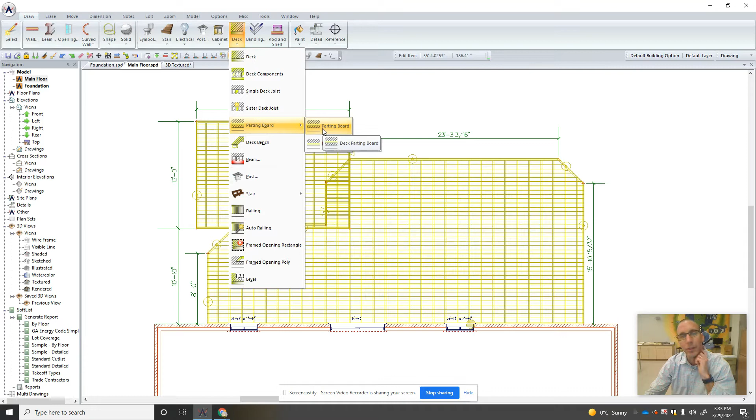Parting board, let's put it down the middle here. Let's take a look here. Oh, nice. So you can split them up, get a little fancy. Cool. All right, we can throw another one in here at this corner. Oh, that just got rid of all the deck boards in between. Have to play with that. Okay, anyways, let's get back to what we're doing.

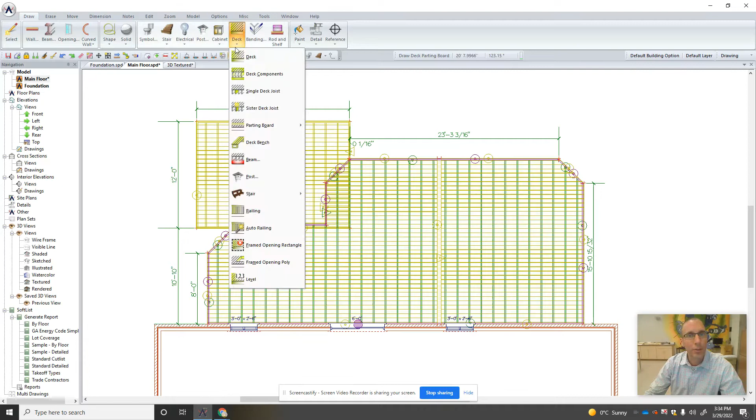So under deck, we've got our beam. Here's our beam sizes. So once you figure out what sizes you have to deal with or use, you can pick them up here. So there's your 2-ply 2x6, 3-ply 2x6, 2x8, etc. So I'm just going to pick a 3-ply 2x10 for now. I'm going to stick it here underneath the deck. Boom, there it is in a red line. Right mouse click to stop your beam.

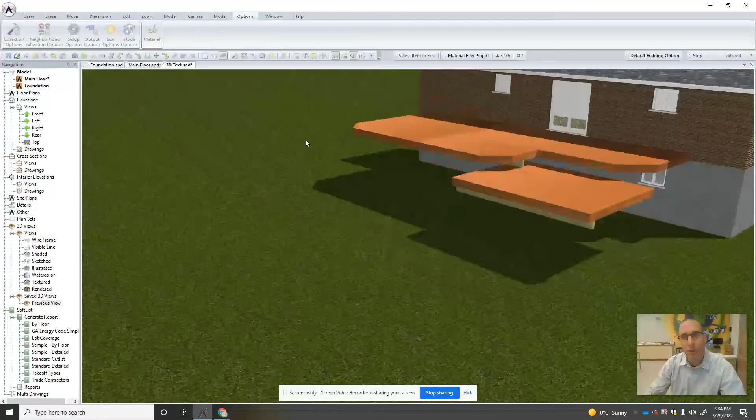This one's going to need a beam across here as well. Boom. See what happens in our texture. Are they putting them in the right spot? The beams are in the right spot, so you don't even have to offset them. It's finding the deck and putting them right underneath the deck, which is kind of nice.

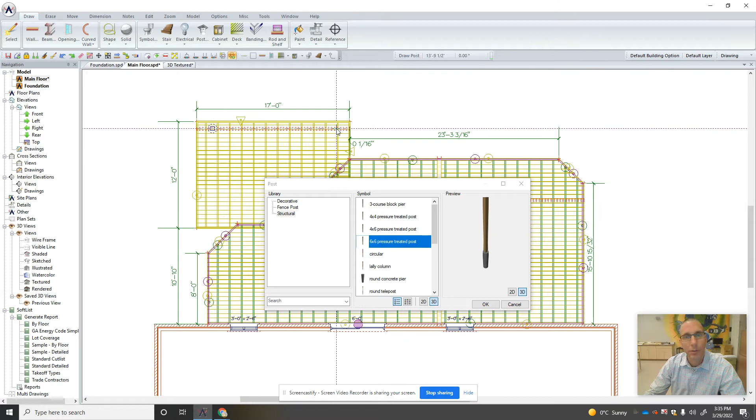And similarly, let's try and put some posts in. Post. We don't want a decorative post, we want a structural post. 4x4 pressure treated, 6x6 pressure treated. Let's click underneath the beam, click twice, click twice, click over here, move this out of the way.

That one doesn't look quite lined up. We'll clean that up in a minute. Click OK, let's go to our texture and see what happens. Okay, so posts are not adjusting the way they're supposed to be adjusting. They're putting the foundation of the post in line with the foundation of the house, so we definitely have to adjust them down.

Okay, so we're going to have to edit that. Click on this. Pressure treated, the height is 12 feet. That's a very tall post. Got to do some math here. Under common, you'll find the offset. So right now the offset is 4 feet down. We want, our grade right now is 8 feet down. So we want 8 plus 4, which is 12 feet down.

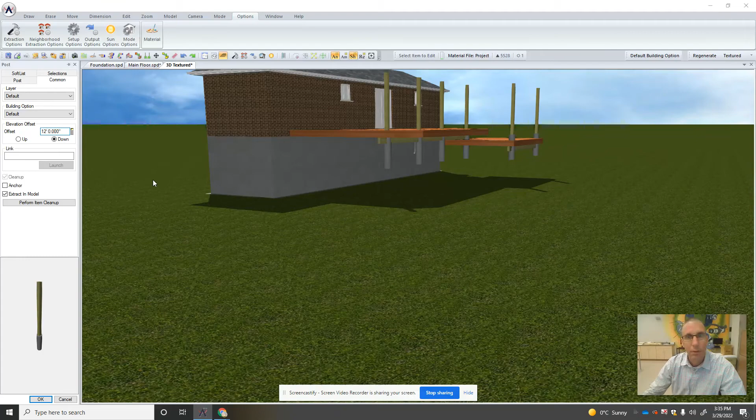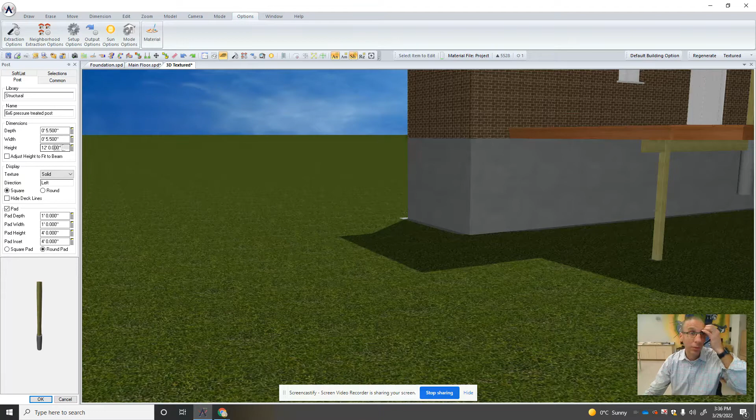Click on that, there you go. And we need to shorten up the post height because the post height is going right through that beam there, which isn't what should be happening. Okay, so we know that 8 feet is to here. This beam was a 2x10, so it's another 9.5 inches. So we need to take 9.5 inches off this 12-foot post. So we can go here and say minus 9.5 inches. Click OK, click OK, and that post drops down.

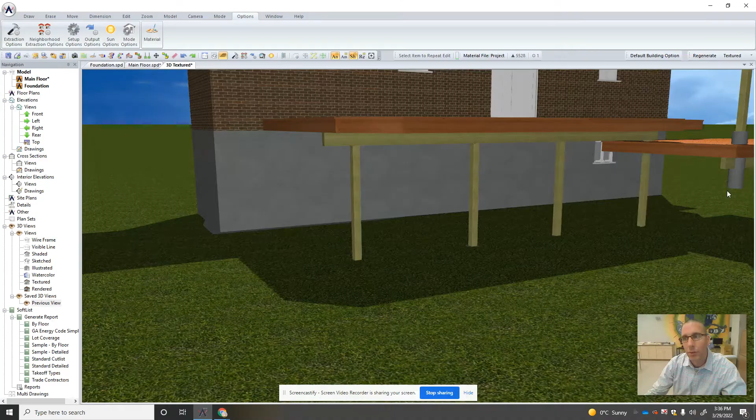And now, if you did that all in one step, you should be able to go up here to the Repeat Edit tool, click on it, and click on all your posts, and they should drop downward to where they need to be. Now this deck is a little bit lower, right, so it's going to need to have those posts shortened up even more. So we got to do some math there because it's overhanging a bit here. All right, and we can figure that out and get that set up.

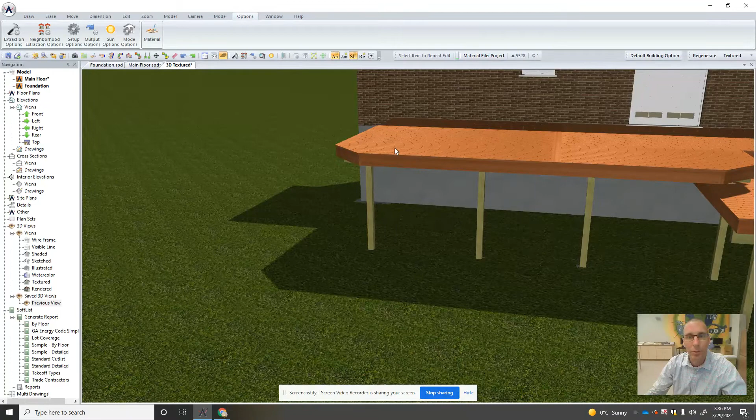And then we want to work on spacing and stuff, so we'll deal with dimensioning those out and spacing them as well. So on here, if you go back to your extension tool, click on extension. You can see here when you hover over things, they get bolded or like kind of fuzzed out or whatever. That's what you're extensioning.

So if I click on this beam and click drag out, it extensions to the center of the beam. Okay, if I click on this post and drag out, let's go out the top here. You can see there's the edge of the post. Click closer to this edge. So if I'm trying to get post spacing, I can put extensions on the inside of the post and then drag out this to get them in the right spot.

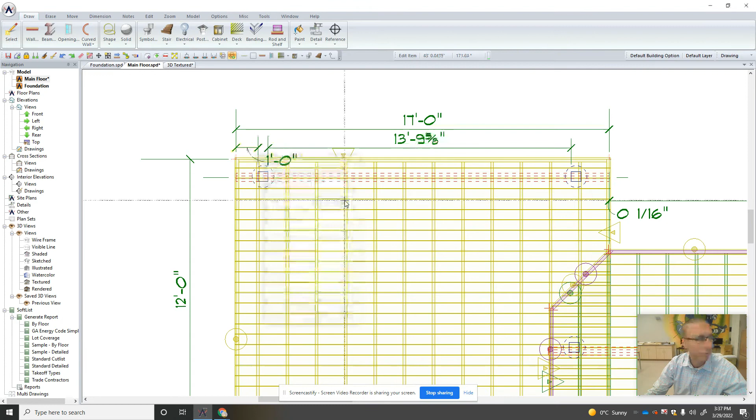You may want to dimension them to the edge of the deck as well if you're being picky about being a foot in, because remember, we can only have a 2-foot overhang max. So if I want that post to be 1 foot in, I can click on this dimension, 1 foot. Make sure you're moving the post. And then adjust the post spacing on the inside. And we're good to go.